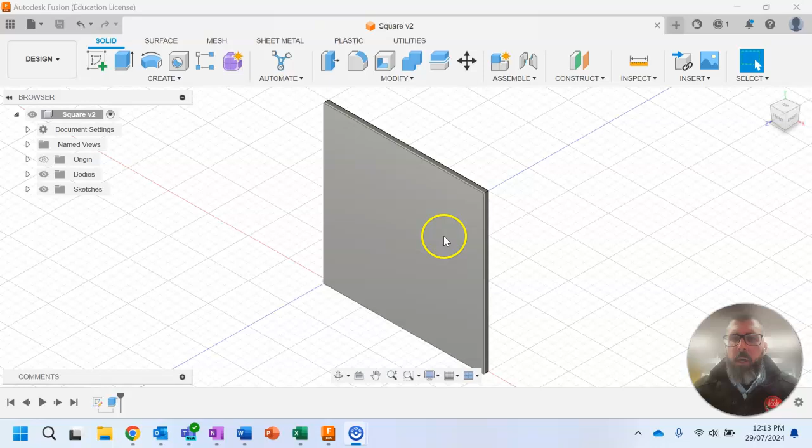Welcome to video 2 of our Year 7 Basics Fusion 360. In our first video, we made a two-dimensional square and extruded that into a three-dimensional object.

We're going to make sure that work is saved. If this save icon isn't showing, that means it's up to date and saved. You might want to make sure it is saved before moving on.

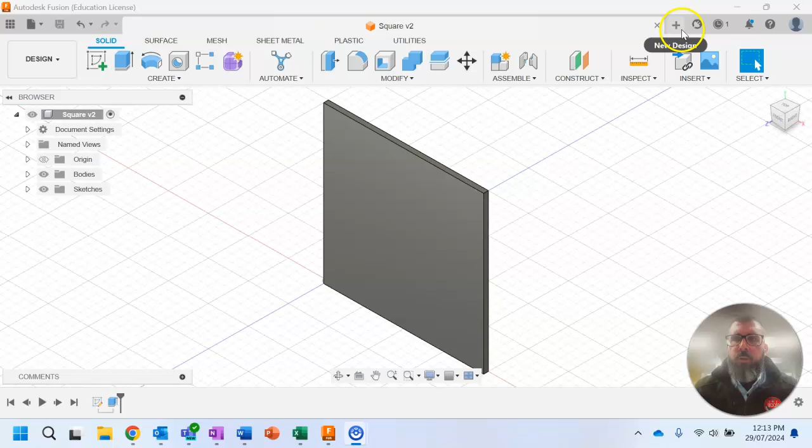Once we have saved our square, we're going to start a new design. Hitting this plus symbol on the top right here is going to open up a new blank design for us to work on.

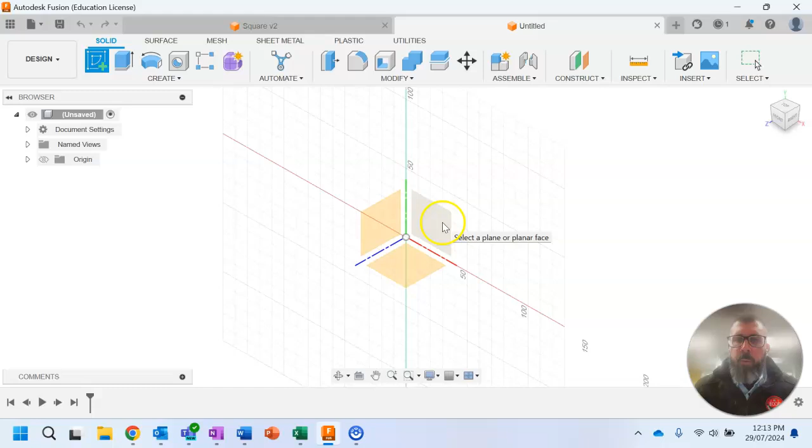Just like we did when creating our square, we need to create a new sketch. We have our create sketch icon in the top left, and we're going to select the same plane we were working in before, and it will rotate around like that.

We are going to create a basic circle. Last time we used the line tool and the 2-point rectangle tool. Next to that we have our center diameter circle option - if it isn't showing, we can drop down the menu for other options. We're going to use the center diameter circle tool.

Diameter is the distance across the center of a circle, going from one side to the other. We're just going to put that on our origin.

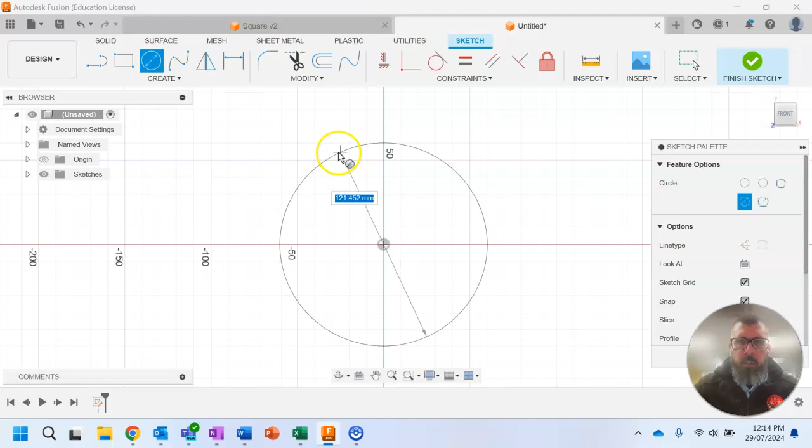There are two ways we can do this. I can click and drag it out to get our distance. We're going to make our circle 75 millimeters, so I'm going to come out a random distance, a bit bigger, and just click it.

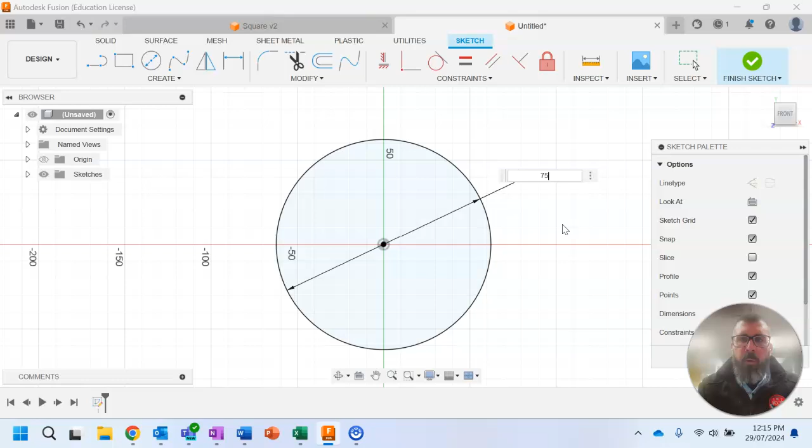We're now going to use our dimension tool - sketch dimension, or D on the keyboard as the shortcut. We select the outside of the circle and make it the correct size, just like we did with the square. We take that down to 75 and hit enter, which changes it so the circle won't change anymore - it is 75 mils in diameter.

But if I go back, we can also do that originally - as I click and start to drag this out, if we type in 75, that will also make the diameter of that circle 75 millimeters.

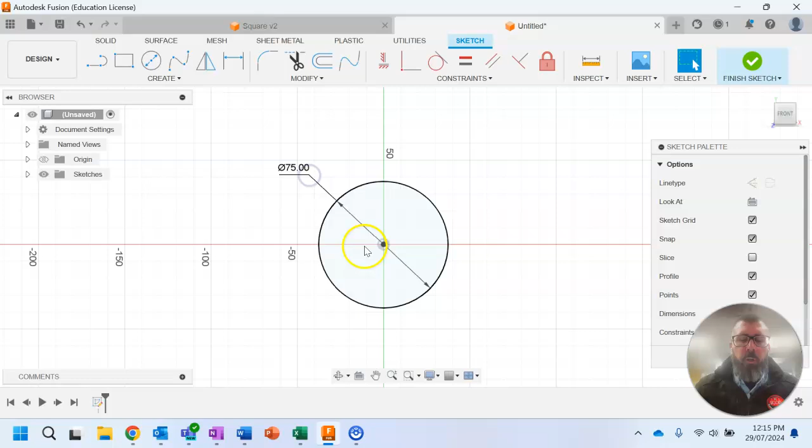Making sure we are saving that image as well, I'm going to finish that sketch. It goes back to the two-dimensional one, but to make sure we have it at the right dimension, we're going to go back into that sketch.

Looking down the bottom here, we have all the things we are doing in Fusion 360. So we have Sketch 1, which is the sketch I just did. I'm going to double click on that sketch and it's going to open it up.

To make sure I have it at the right dimensions, we're going to screenshot it while we're in our sketch dimension workspace. Hovering up top right so I can see my name, it's Windows Shift S on the keyboard, and that takes a screenshot.

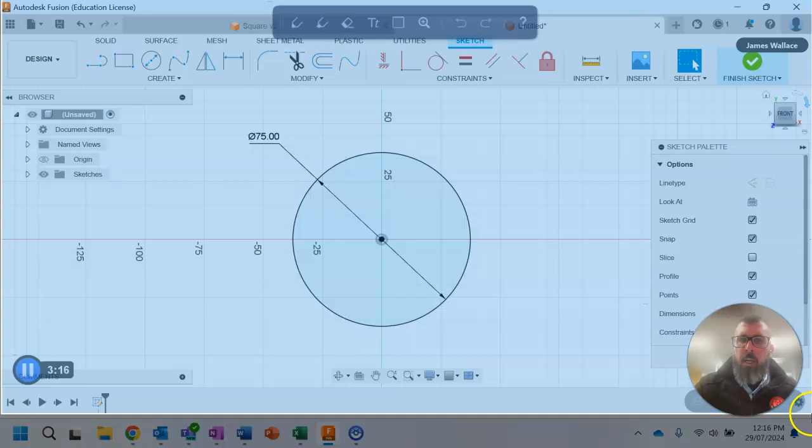I'm going to drag that across, making sure you can see the name in the top right corner here - it's got my name - and then we would be putting that into our notebook as evidence.

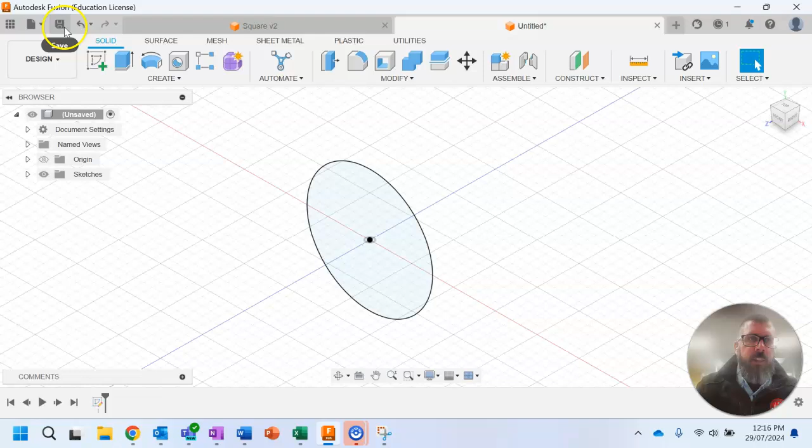Once we have screenshotted that, we'll make sure we have finished the sketch and saved it. So this is our circle. I'm saving it in the Year 7 Design Technology folder, which I created in video 1.

Okay, same process - we're just getting a bit of reinforcement of the learning. We're going to turn our 2D circle into a three-dimensional shape by giving it some depth.

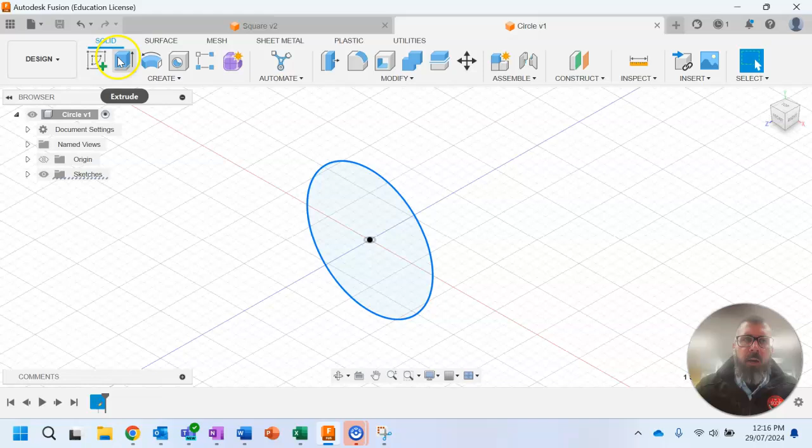We can either hit E on the keyboard again, or use our extrude tool at the top. I'm going to hit E on the keyboard, make sure the circle is selected and turns dark blue, and then make that 3 mils again.

We don't want to extrude it too much since we're going to be using acrylic, so we make it the same dimensions as the acrylic we'll be using. I hit OK on that, and now we can see that it is a three-dimensional object.

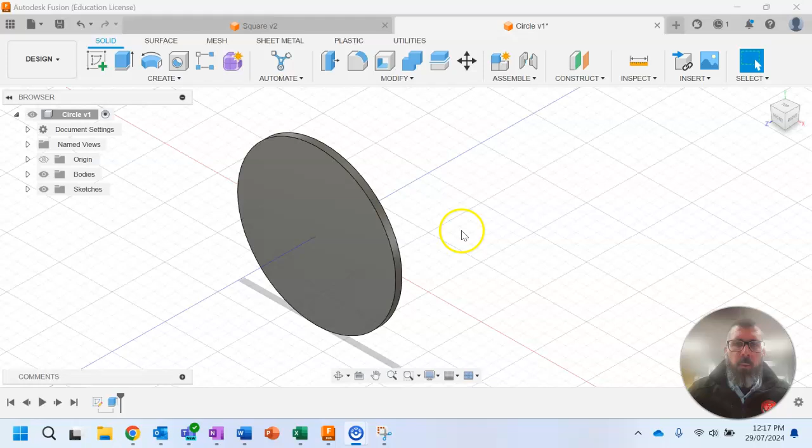Now we can screenshot that one again, making sure we have saved it - use save, hit OK - and we're going to screenshot that one and insert it into our formative learning task.